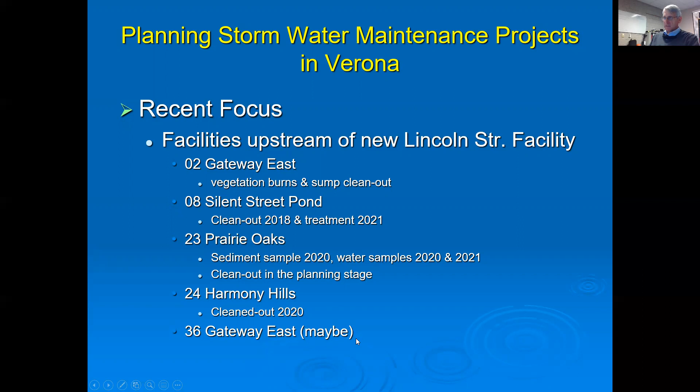We cleaned out the Harmony Hills Basin in 2020 and finished up some of the restoration work in 2021. And then there is another detention basin area upstream of Lincoln Street that we may give some attention to, called the Gateway East Pond. So I'll show you those on a map right now.

Our Lincoln Street facility is down behind City Hall off of Lincoln Street and what we call the Lincoln Street Channel. That was constructed during the summer and fall of 2021. It is substantially complete now. Water is being diverted into that basin through a wet pond and into a bioretention area. Very highly engineered facility. Upstream of that, water comes from Silent Street Pond down storm sewer pipes. Silent Street Pond is across from the Verona Public Library.

Upstream of Silent Street is the Prairie Oaks Pond. This is the number 23 pond, which I had mentioned that we are planning to do a major clean out project on this year, next year. It's a pretty good sized pond. It's our second largest one. So this one's going to take some planning. The Harmony Hills Basin is a dry basin off of Enterprise near Prairie Oaks Drive up on the north end of town.

The Gateway Pond is a natural kettle surrounded by housing that occasionally we have to pump out when we have high water conditions, and that water makes its way into Prairie Oaks Pond, Silent Street Pond, and then down to the new Lincoln Street facility. The Gateway East Pond, that 02 pond that we've done a couple of burns on, is located across the street from Gateway, where Cohiba separates the two. And in between, there's a stormwater sump that we clean out annually.

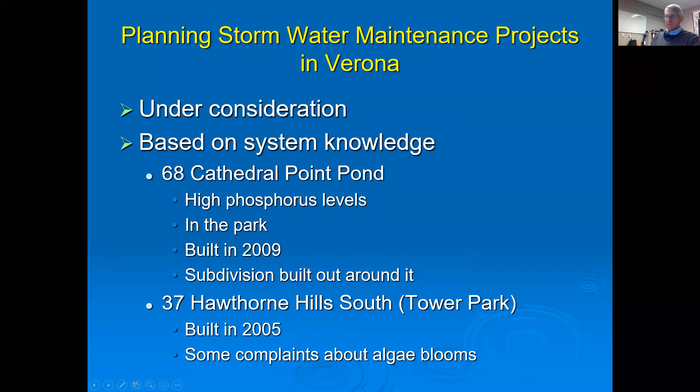And then 37 Hawthorne Hills South, or Tower Park, was built in 2005. We've had some complaints about some algae blooms in that pond, so it's time to start paying attention to that one.

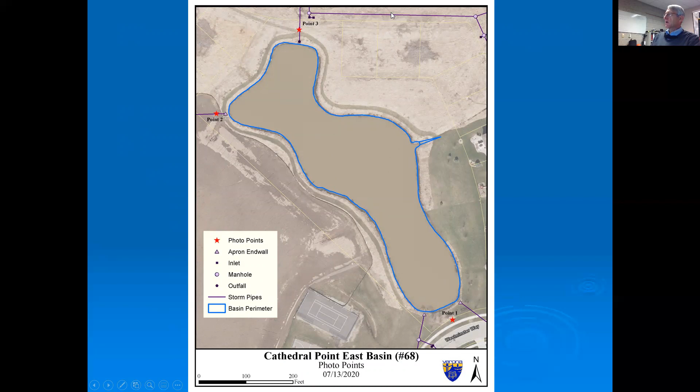Cathedral Point Pond is located in Cathedral Point Park. This is a bit of a dated basin map because it doesn't show all of the houses that are built out around it. Here's Westminster Way, and here's East Chapel Royal up on the top of the pond. Here is the Hawthorne Hills South Basin, located off of Fairview Terrace. The water tower for Water Tower Park is located just off of the map here.

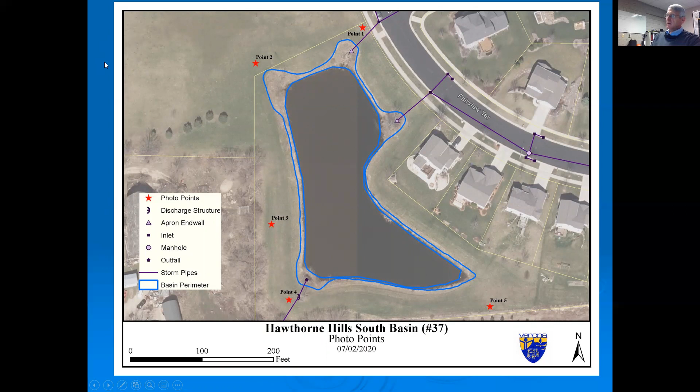Some things that are coming down the pike that would drive plans to address these are the fact that the Sugar River is on what's called the 303 list for impaired waters, and it's listed as impaired because of the high levels of phosphorus in the river. And phosphorus is a contributing nutrient. When it's in excess, it causes algae blooms.

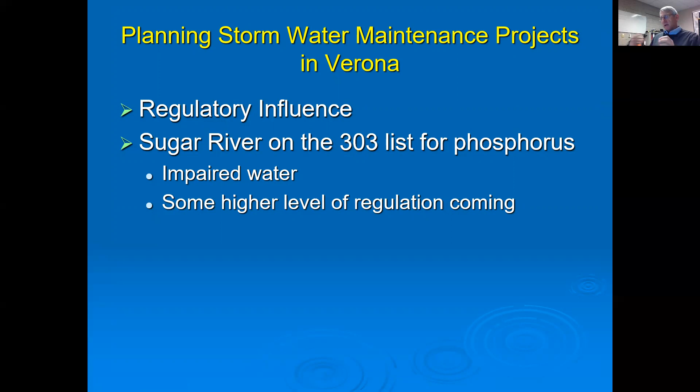And the story behind the Sugar River having high phosphorus is the fact that the DNR has been doing some monitoring, and then also between 2015 and 2017, the Watershed Association, which I was a part of for quite a number of years, had done phosphorus monitoring at various locations over that 3-year period to get a sense of what the phosphorus levels were in the Sugar River watershed.

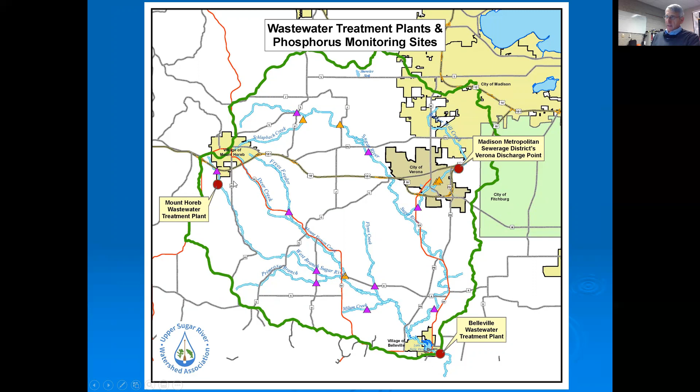So this map shows the locations of those sampling points from the various years and the wastewater treatment plant discharges that come into the basin. So wastewater treatment plant discharges are typically relatively high in phosphorus compared to the water quality standard for surface water, particularly streams.

And in particular, the flow in the Sugar River Basin and the tributaries that come into the Sugar River, a lot of that flow is wastewater discharge. So MMSD discharges to the Badger Mill Creek just east of the Park and Ride lot along East Verona Avenue. If you take that bike path east towards Madison, you'll go past that outfall. It's a big rock structure.

And they discharge at about 250 micrograms per liter of phosphorus with their discharge. And that's actually a really good level of cleanup for wastewater treatment plants. However, the standard for water quality in rivers is 75 micrograms per liter.

Just to give you an idea of where our pond water sits, we've measured phosphorus in a number of our ponds in 2020 and 2021. Our highest level was 933 micrograms per liter. That was at an Investment Court detention basin near our public works facility. Our best water quality data came from American Way Pond in 2021 after we treated that pond to clean it up.

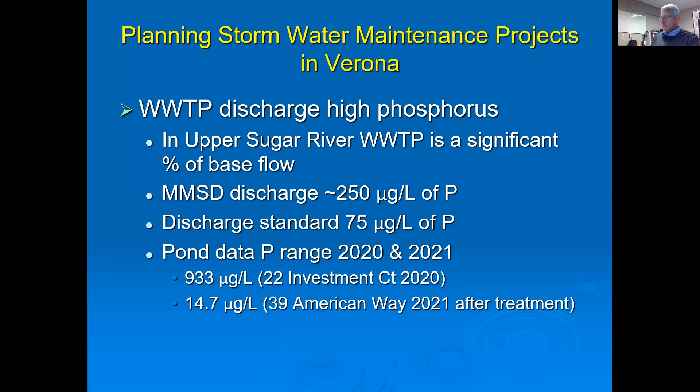There are some presentations available on the library website that talk about some of these other items. I would encourage you to go and check those out to get a little bit bigger picture of the whole stormwater management program in the city of Verona.

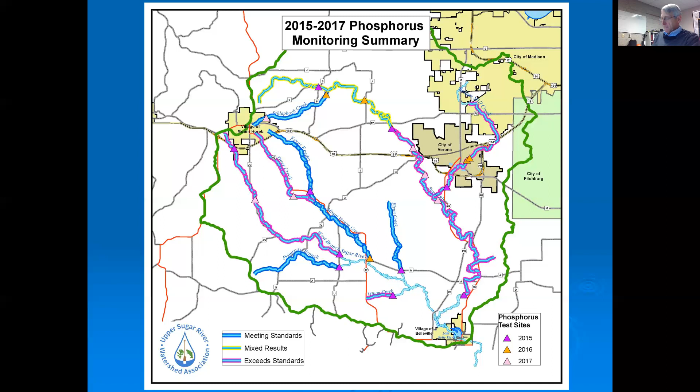So in the city of Verona, we have 4 receiving waters for our stormwater detention basins: the Badger Mill Creek, the unnamed tributary, the Sugar River itself, and then some kettle ponds. So we've taken the city and identified where our stormwater detention basins discharge to, in anticipation of some standards coming down the pike where the DNR will change how we're regulated in terms of our stormwater discharge, and being prepared to then address how we handle stormwater coming out of those ponds, depending upon what the DNR decides they want to do or where the regulations drive us.

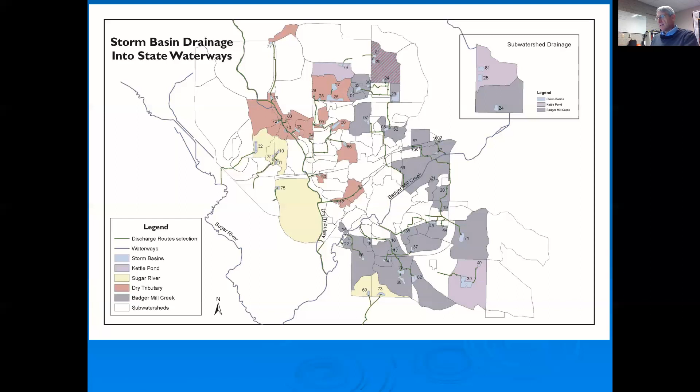So what we've done is to prepare and be ready to react once we know how those regulations are going to come down the pike. So it's not known exactly where the focus is going to come when the DNR decides that it's time to address the fact that the Sugar River is a listed impaired water for phosphorus. There are a couple of strategies. It depends on the permitted entities and how they come together and decide to react to that.

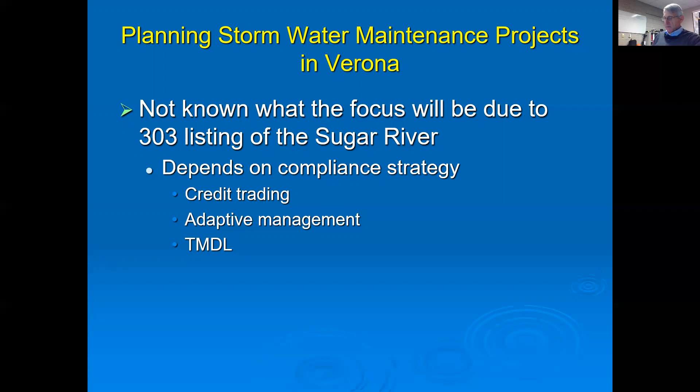Whether the treatment plants decide to go on their own and do some credit trading, or whether more of an adaptive management approach is taken, or the possibility that something called a TMDL, which stands for total maximum daily load, is imposed on the permit holders, where there's a whole series of monitoring. And that would likely be the case if the whole Sugar River, not just the upper Sugar River portion that I've shown on the maps, but that whole portion that drains all the way down into Illinois and into the Pecatonica River, is addressed as an impaired water as a unit.

So we've sorted those stormwaters into the various receiving waters. We've got our database looking at the years of construction. We're looking at which basins are upstream and which basins are downstream. We're also looking at the pond size ratio to the contributing drainage area. All of these things are factors that will have to be taken into consideration.

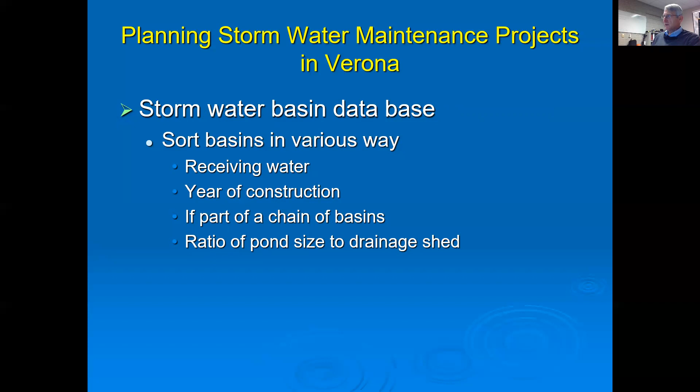So this is how the city is preparing for what seems to be an eventuality of having to deal with some different level of regulation than we're currently under for a stormwater discharge permit. So we think that things are going to change, and so that's why we want to put out that the city is doing some preparation work in anticipation of this. We'll want to be flexible. What we think we've got our eyes on for 2 and 3 years may change depending upon how quickly those regulations come on.

The ways we're going to look at improving water: we've done some pond treatment. Again, go to some of those other presentations; I've got one on pond treatment. We've done some pond cleanout projects. We're doing vegetation management strategies, looking at trying to enhance the native vegetation to get more infiltration going, get some filtration of that surface water before it gets into the stormwater basins.

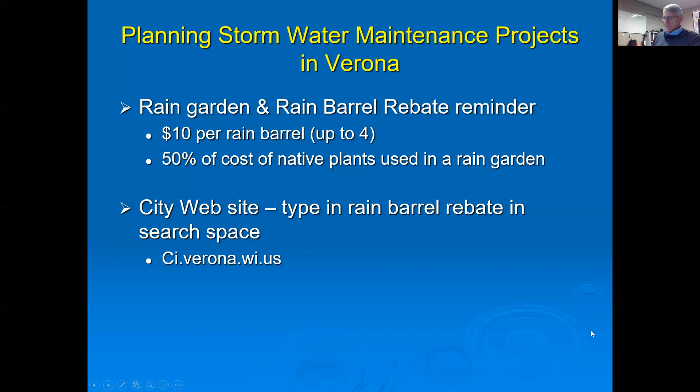I'd like to remind you of some things. We've got some yard waste and leaf management policies in place. You can go to the city website and look for that information on what we pick up, what we don't pick up. Basically, the message I want to get out to you is that the city does not collect yard waste during the growing season. It does collect brush. So that's that bigger woody debris that is a little bit more difficult to handle. We go around the city about every other week and pick up that woody debris.

During the leaf season, we'll go around the city almost on a weekly basis to try to get those leaves, where currently our program is to have you put those in the street and we get them picked up with a mechanism that's very different from many other communities. I wouldn't be surprised if that is changed in the relatively near future. But I also want to say that the city gets around more often than other communities do to collect those leaves. So be aware of that.

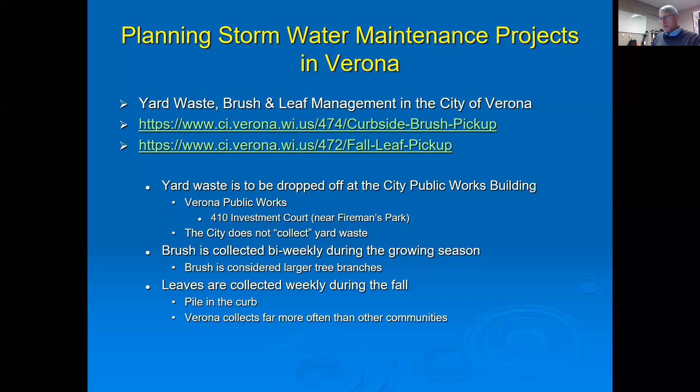The reason that leaf and yard waste management is important is that vegetation that's left in the street is a source of phosphorus. That's what gets into our stormwater ponds. That's one of the reasons our stormwater ponds can have high phosphorus levels.

I'd like to ask you to be a water conscious person. Consider installing a rain barrel, consider installing a rain garden on your property. Keep your trash and your yard waste out of the street. Utilize the fact that the city has a yard waste drop off at Public Works. Consider adjusting your water softener so it cycles just a little bit less. That's a request from MMSD. They have concerns with rising chloride levels in our wastewater, and some of that is due to water softeners.

Be judicious with your salt use during the wintertime, and consider joining USRWA, or at the very least, taking advantage of the volunteer programs that USRWA has. USRWA is the local watershed group. It stands for Upper Sugar River Watershed Association. As I said, I was a member of the board. The City of Verona is a member of that organization, and the volunteer opportunities that USRWA provides for citizens in various ways is one of our ways of providing volunteer opportunities for our citizens. So please take advantage of that. If you Google Upper Sugar, it'll take you to the Upper Sugar River Watershed Association website.